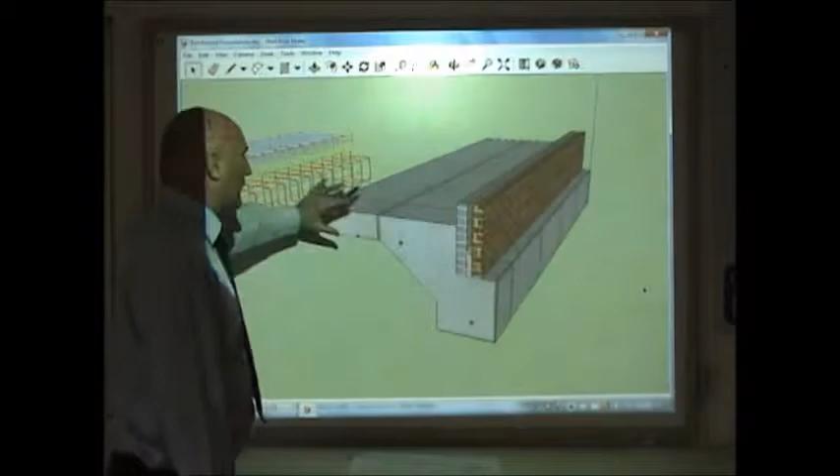This foundation is what we call a raft foundation. The whole lot covers the footprint of the building. And what I can do here, we can flick it around and have a little look. We'll have a look underneath. On this side is the steel cage, what the concrete gets poured over, and that stops the foundation from cracking.

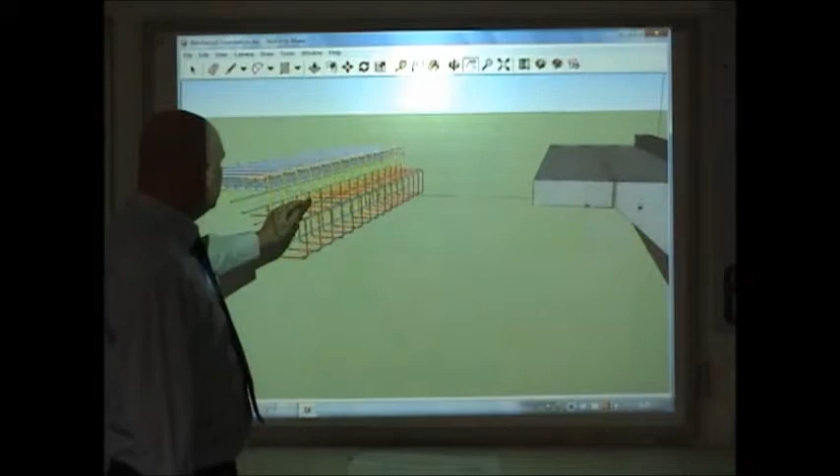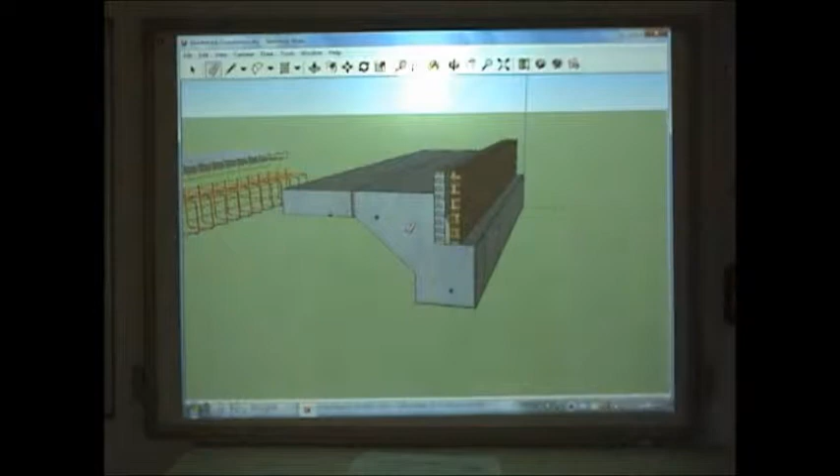Now it's all tied together with steel ties. Concrete is great in compression, but it's not so good in tension. So what I can do now then is, for my learners and stuff, I can start to reveal some of the parts. Now if I go on there, there we go.

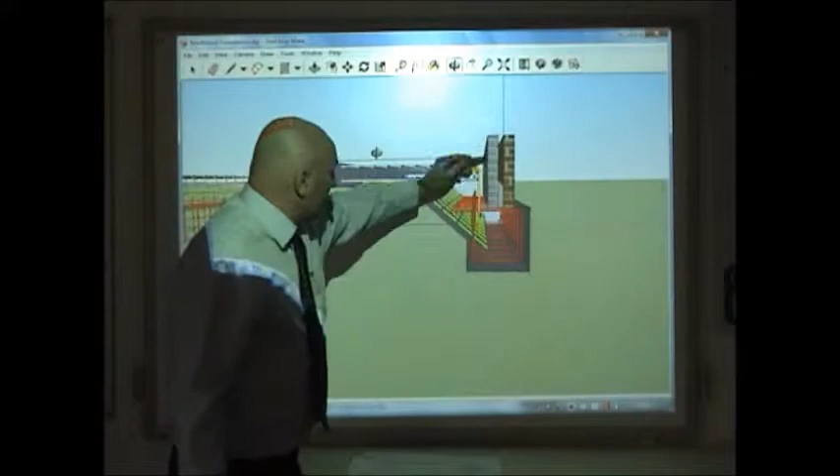I can now see the steel within the concrete, how it goes in. And you can see on the outside what we call the ring. That takes most of the weight of the building, so that has heavily got steel in there, steel rebar, and that will all be tied together, so it's one big structural component.

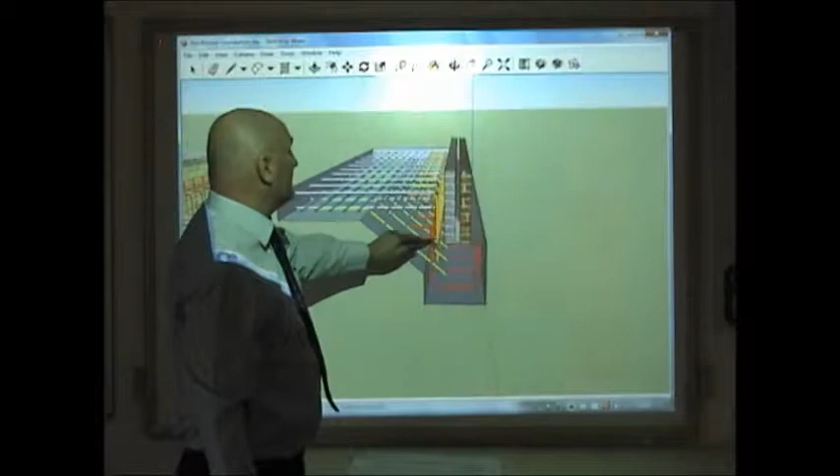We've got our inside blockwork, we've got our outside brick skin, and we've got what we call our cavity fill, and that's to stop the soil from crushing that up on the side there. Now what we would do, we'd go up to our damp proof course, and then we would start our decorative bricks on the top.

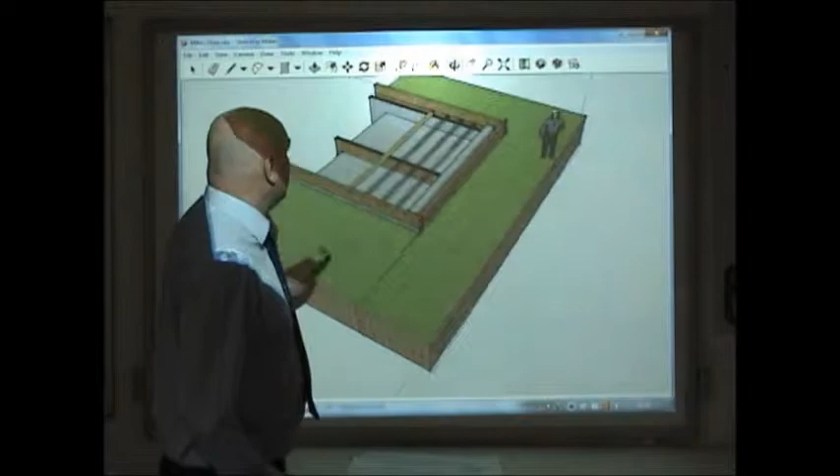This is a section through a floor of a house that I've drawn, and the idea is the students can come to the front, we can spin it around and we can discuss the things. What I've done is what we call a hollow suspended timber floor, which is this one, and then this one is a concrete floor, what we call a beam and block floor.

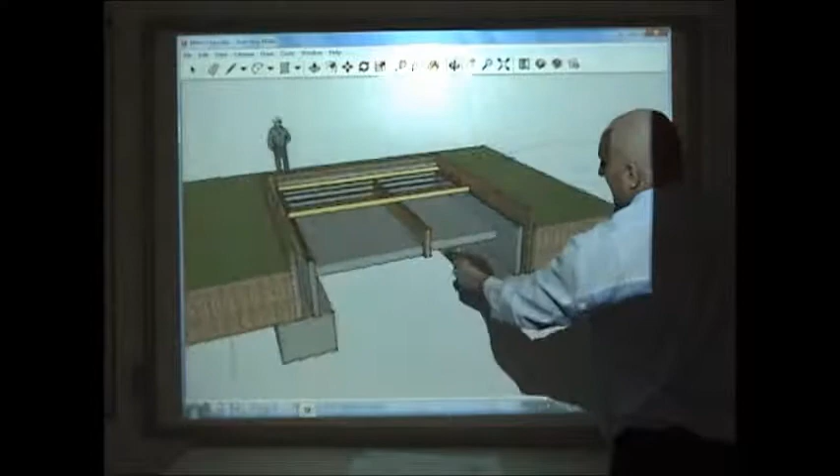And what I can do with this, I can spin it around, we can have a look underneath and how it goes together, see all the components. What else I can do, I can strip it back if I want, I can turn it over, spin it around for my learners to have a little look at.

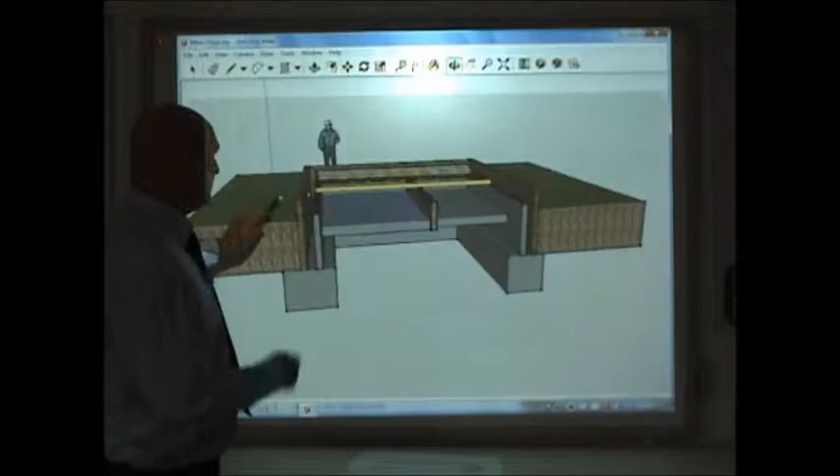And I can say to them, okay, come and show me where the sleeper wall is, come and show me where the damp proof course is, show me where the air bricks are. What happens if we don't have air bricks? What happens if the ground is higher than the DPC? What type of foundation is this? What would happen if we used a different type of foundation?

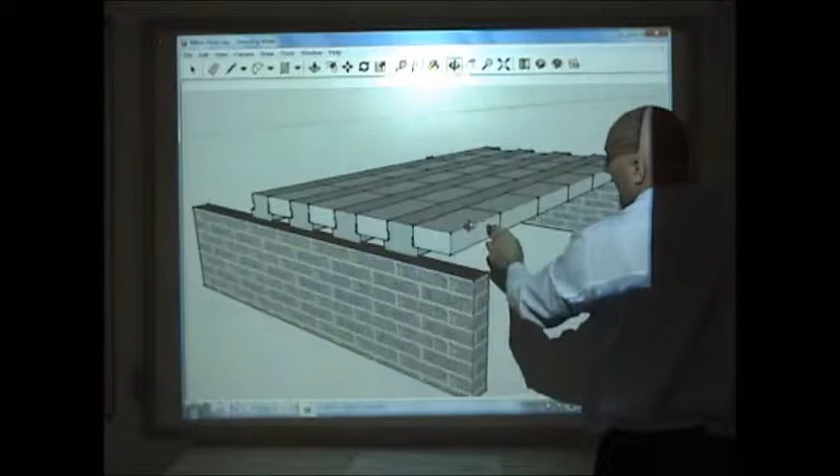This one is my concrete floor, and it's a beam and block floor. And again I can say to them, why is this one better than the other floor then? Is it better for the environment? Which would be the first piece we put down? Which would be the last? What would happen if we had services coming in through the floor? What would we have to do then?

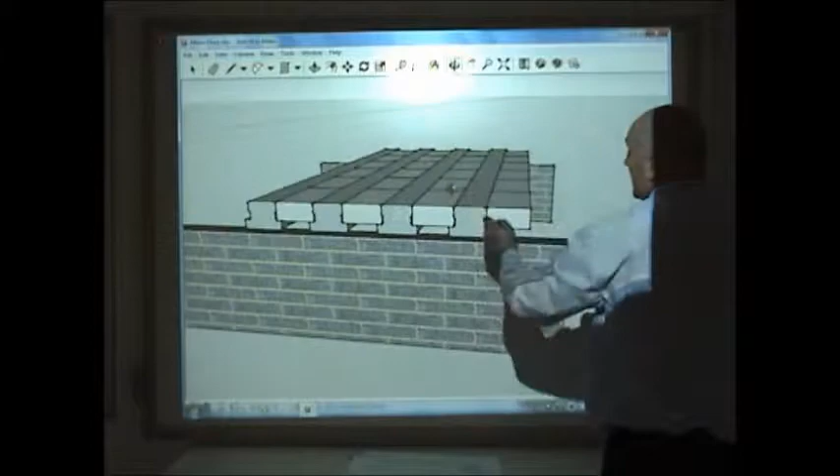Why do we sit it on damp proof course? What types of bricks are these up to damp proof course? Are they engineering bricks? How would you finish the top of the floor off?

All these questions can be asked within the classroom by using Google SketchUp. And on a smart board, I wouldn't be using a pen, I could use my fingers. Students can come to the front and move it around and show me various components.